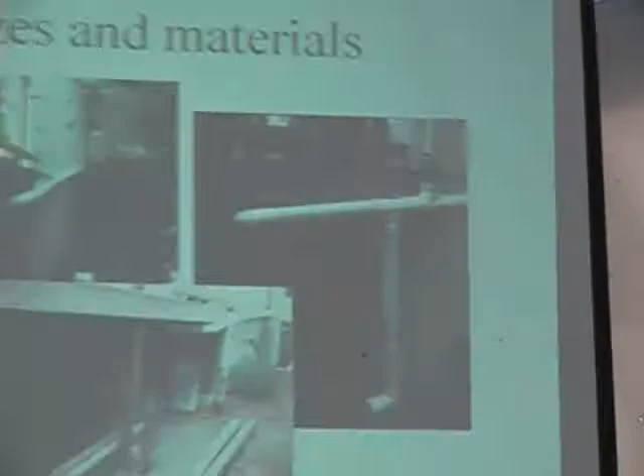Bottom center photo, he didn't get his rebate at that point. It doesn't have a first flush filter on it, so in the top left-hand area it shows he didn't have the first flush filter, but over on the right it shows that he does have the first flush filter. Well, I made him add that first flush filter to keep the debris out of it, and to also shade it with shade cloth.

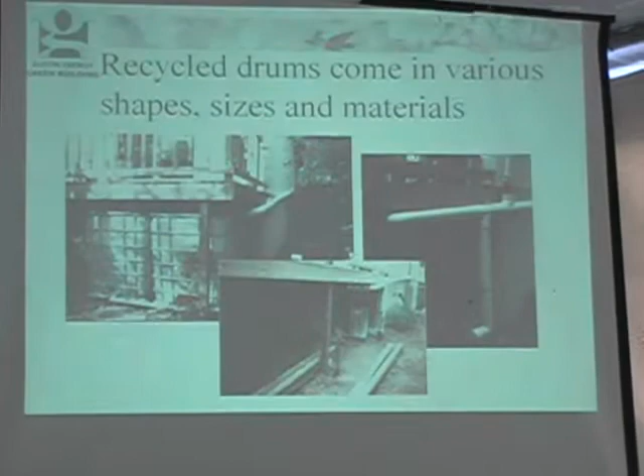If you can't paint these tanks and they're not black or opaque, they're going to grow algae. So he used shade cloth that he can bring up and bring down to keep them from getting the algae in. Okay. The City of Austin Water Conservation Program used to sell these for, I think it's about $60 for Austin customers. They were very limited.

Now you can buy 4 at a time, as many times as you want to. Outside the City of Austin, you can buy them for $90. Retail, they're about $129, $139 on the internet. But they have distribution times from time to time at the city, and I think you still have to prepay for them because it's a pretty popular little 75-gallon rain barrel.

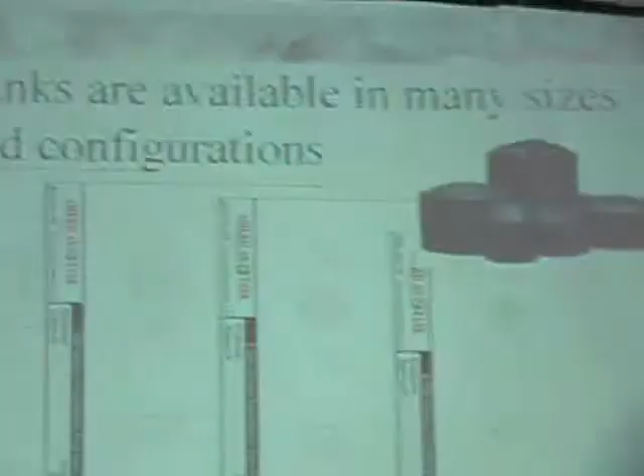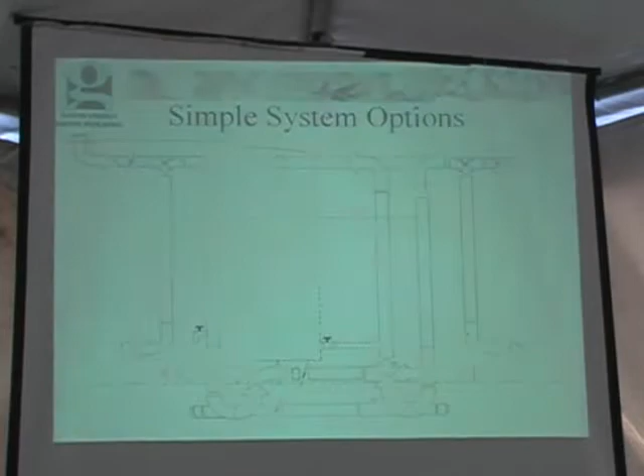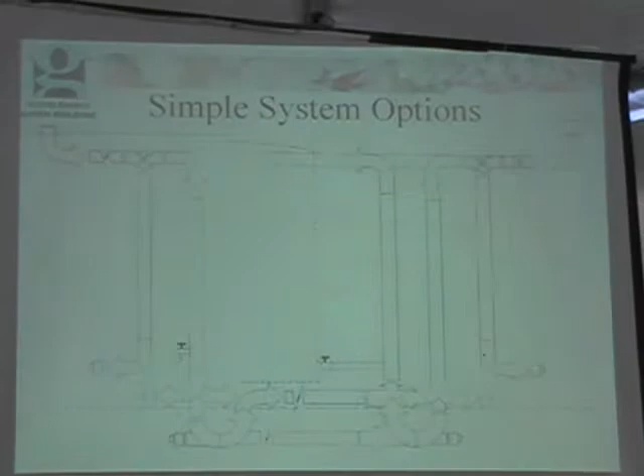Tanks come in very many different sizes and configurations. There's all different manufacturers. Okay. This shows a little simple system, and I was going to put this up on the board, but I have it in my booth right behind here, and it shows that system in a little bit more detail. There's all different ways to get the rainwater in the tank. Main thing I'm showing here is that once you pass the first flush filter and you're getting it into the tank, you can go underground, above ground, you can go above ground and over ground, so you can just mix it up however you want to.

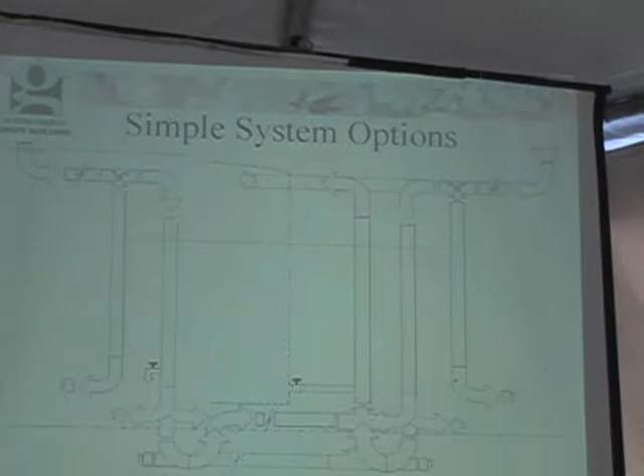But in this particular little system, there is a valve right in the center of the system there that looks like it's on a little dotted line on the tank. That is the usual outlet for the tank, but I've also taken the water in to that. So that's an inlet as well as an outlet. So by taking the water into that, as well as going up and going into the side of the tank, when the tank's filling, a 2-inch valve's open. If it's raining a lot, it'll go in the 2-inch valve and also go in the top of the tank.

When you're finished, the rain's through, probably overflowed. As long as that valve is open, you can get water out of your tank at any corner of your house that's connected to one set of piping to your tank on the ground or underground. So that's where it shows over on the left, another little hose bib. So your collection system becomes your distribution system if you feed the water into the bottom. So the way I use this, go ahead, I think it's the next slide, I'm sure.

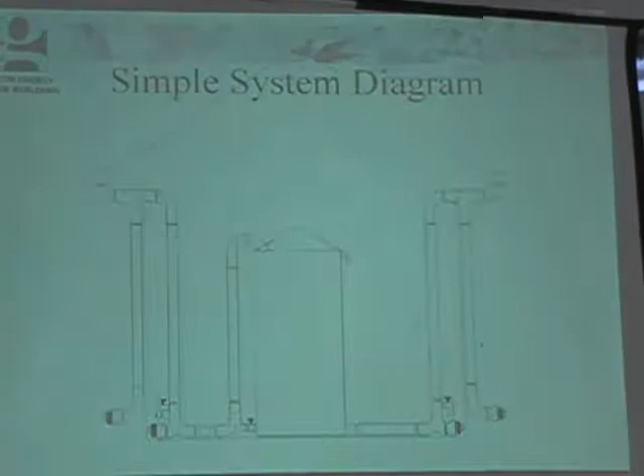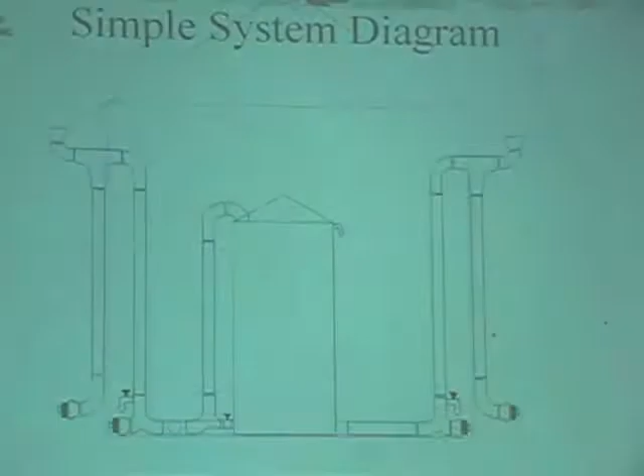The way I use this in this simple little design is I would go over and open the bottom of the tank valve. It would recharge all the downspouts, and then I'd hook a soaker hose up to one of those hose bibs. It'd water a bed. Then I'd go open the valve again, recharge it, close the valve, move it to another bed, and it would water that bed. So it's a very simple way to irrigate. Of course every time you start it up again it's a little bit lower water in the tank, but it's a way to get water out of the tank. And if you want a better diagram of that, I've got a big chart of it that I can show you in our booth.

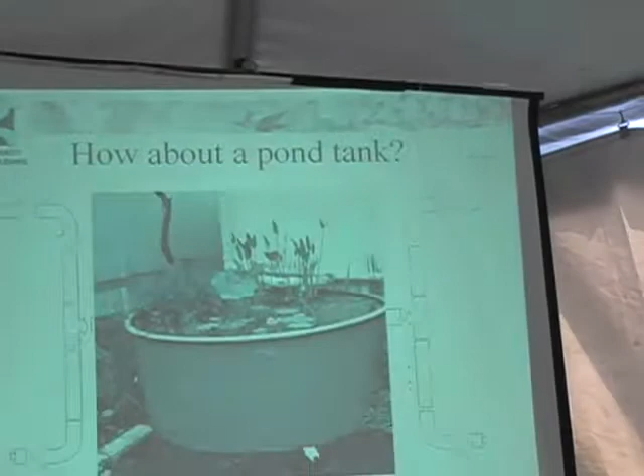Go ahead. How about using a pond tank? Well, this one shows the first flush filters are the 2 little sharp things on the bottom, the left and right. But when it goes back up, then it goes to a common horizontal tank. Hit the slide. Go ahead. So then this is going to a 500-gallon fiberglass stock tank, 3 foot tall and 6 foot in diameter. Go ahead. What you get out of the bottom of that valve is fish emulsion fertilized rainwater. Okay, it'll make your tomatoes just jump out of the ground, or your grapes. Go ahead.

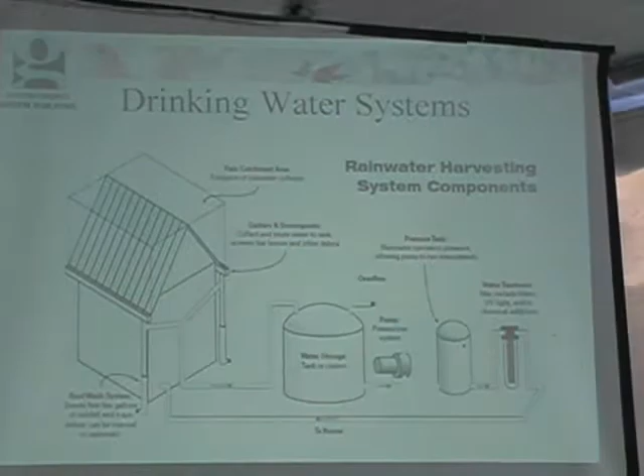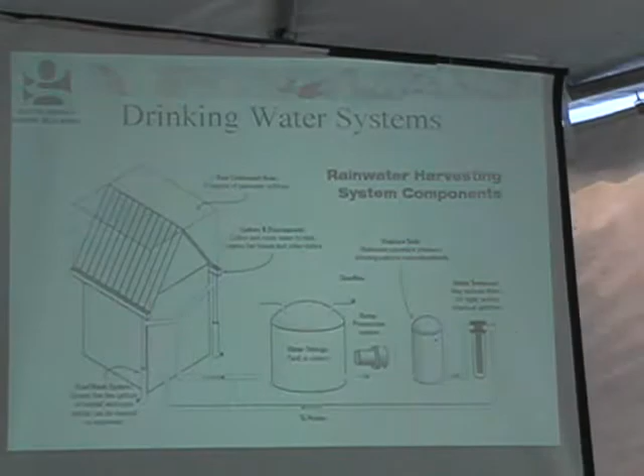Drinking water systems. The City of Austin rebate program doesn't rebate for rainwater systems. If you have a centralized water system available to you in the United States, it's seldom financially feasible to put in a drinking water system if you have that available. You can work out the costs and how long these systems are going to last, 20 years, but some components are going to wear out. If you can get water out of the tap by hooking into a pipe, that's probably the better way to do it.

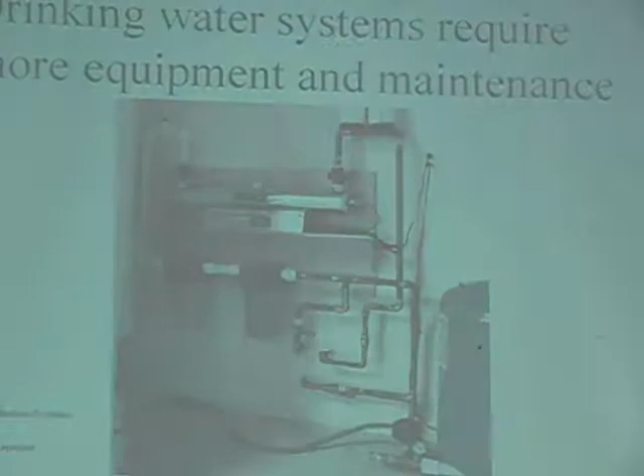There's other reasons to do rainwater harvesting for drinking, but it wouldn't probably be for economics. Go ahead. This shows some various different systems and a diagram out at Tank Town, Dripping Springs, but it requires your own little maintenance system. Go ahead. And it's a pretty complex little device. If you don't maintain this, you become your own water purveyor. But you just have to be careful and keep it clean, or don't invite any attorneys over for dinner. You know, they're not going to like drinking bad water.

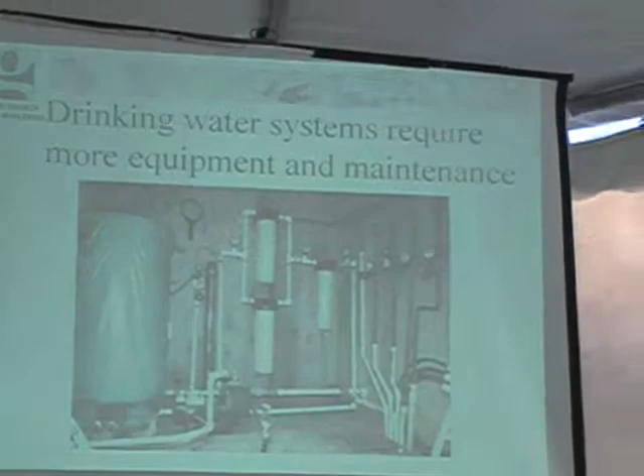Go ahead. They get more complex as you put in more filters, and there's several people here that sell drinking water systems. So if you're kind of off the grid as far as your water is concerned, there's no better drinking water around. I mean, rainwater is great. Go ahead.

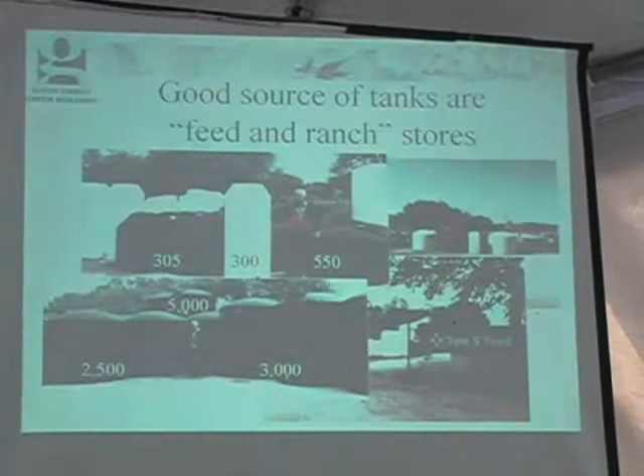The good source of the tanks in this area are feed and ranch stores, or fence supply houses, and they've been selling these tanks to farmers for years. They did begin to bring more of them in green and black because we want to watch that algae growth. But almost anywhere you can find these. It just so happens that one picture there is interesting, strange, but Triple S Feed and 290 Fence and Ranch Supply are across the street from each other.

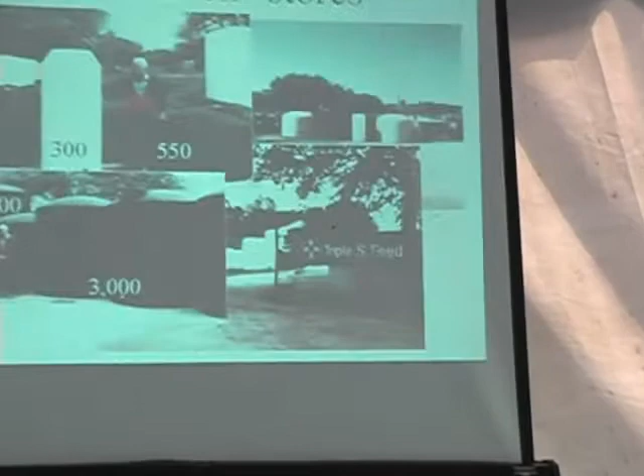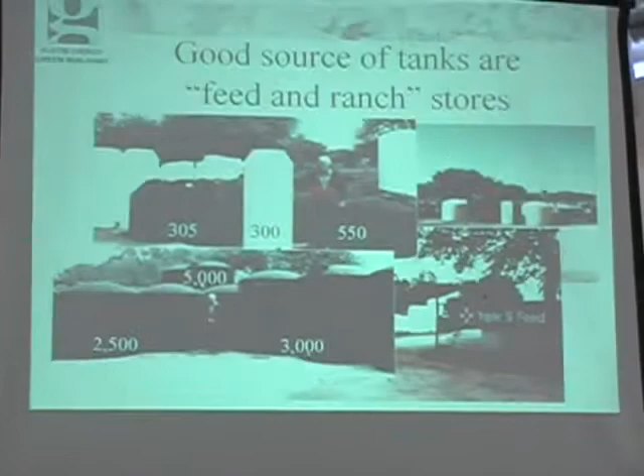Now, if they were real smart, they could price fix, but they don't. So you stand on one side of the street, you get your price, and you holler across the street, and they'll knock it down $50. Then you holler across the street, back to the other guy, he'll knock it down $50. So that's about the cheapest place you can buy them around here in this area. But they'll be 30% more in a town where that's the only source of the tanks. So find competition, get some prices, and you'll come out a lot better with these poly tanks and the pricing.

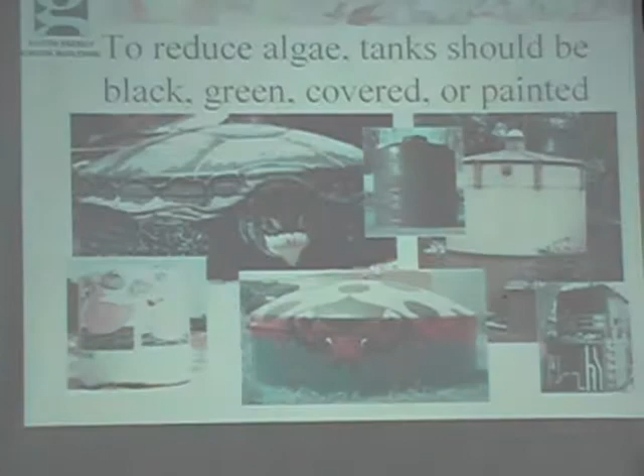Go ahead. You have to paint them. I didn't say you had to paint them white, but you can paint them with anything, house paint, but they do make a special poly primer that probably helps out a whole lot. But you can camouflage them, disguise them. The one on the top right was made to look like a nice little tank with stucco on it and wood. You can encase them in wood, make them look like a wooden tank.

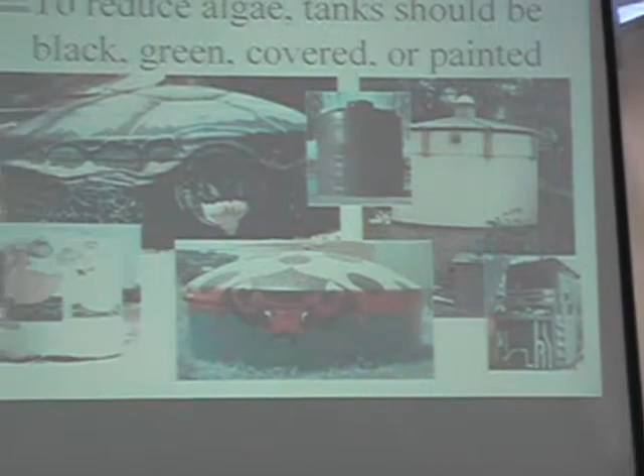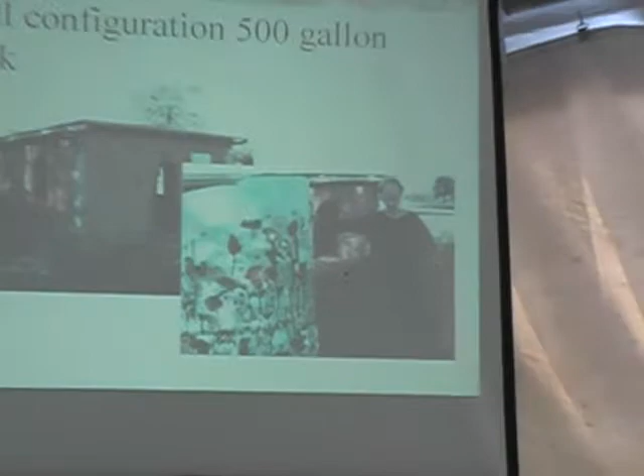Go ahead. This is a tall configuration of a 500-gallon tank. That lady's standing next to a straw bale house that was built at a school in Austin as a demonstration, and they painted it blue and then put wildflowers on it. The kids did all this. Okay. And here's a low configuration of a 500-gallon tank.

So depending on how much space you have, you do a tall and skinny one, or a short and fat one, or if the homeowners association says you can't put it over the top of the fence, you gotta hide it behind there. If they say you can't put in a rainwater tank, ask them if you can put in a storage shed or a garden shed, and they say yes. You get it in writing, you build the foundation, you put the tank in it, you build the shed around it. Go ahead.

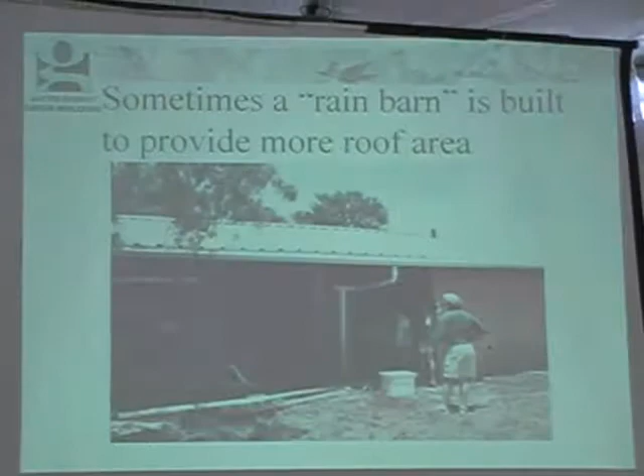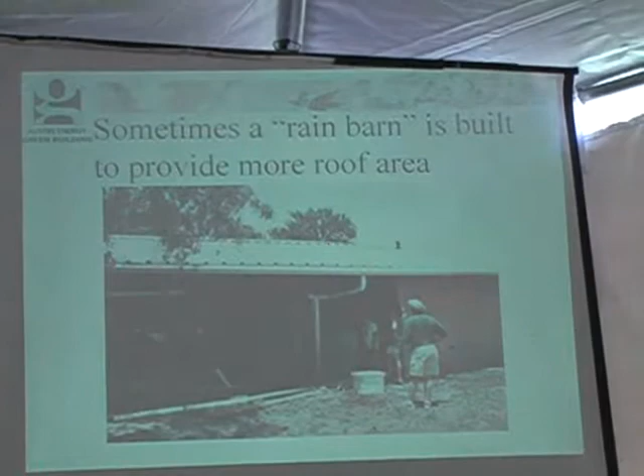Sometimes you can't get enough water. You have too small a house and you want more water. You can never get enough storage, so buy the biggest tank you can, because you're going to be back buying another one pretty soon. Well, sometimes out in this area they have rain barns for no other reason than to store tanks under them and to get the water off the roof. So you'll find some areas here where it looks like there's nothing going on, but really they're just harvesting rainwater. And of course it's good shelter for cattle too, so it makes a good place for them to lay.

Remember that tank inlet must be the lowest point in the collection piping system. This is a school we did in Austin at Westwood High School, and if you ever get in that area over towards Lake Creek Parkway, you can go to the back of the school and find the portable building that has the white piping on it, and go around back and you'll see this system that we put in as part of a classroom project for adults.